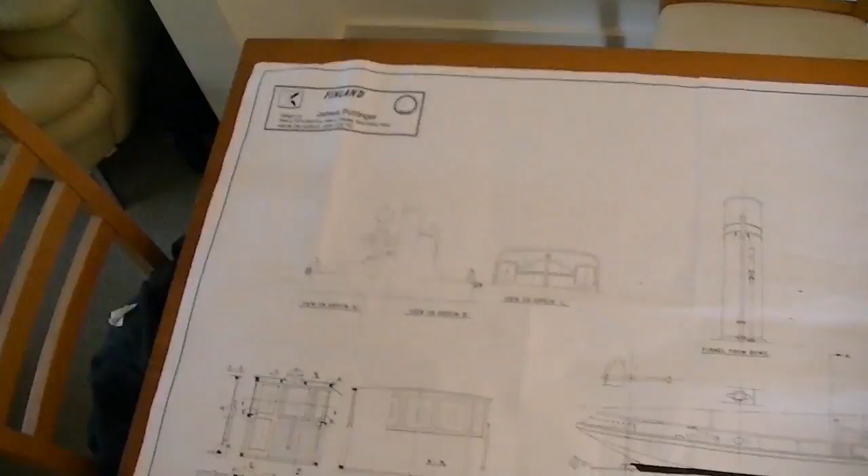They are pretty good, though there are some problems with them that we discuss. There's the scale, we work all that out, work out the cross sections, do a bit of calculation on the whiteboard, then get into making the cross sections, making the keel, putting Humpty together - very exciting - steaming some timber so it will fit on the boat.

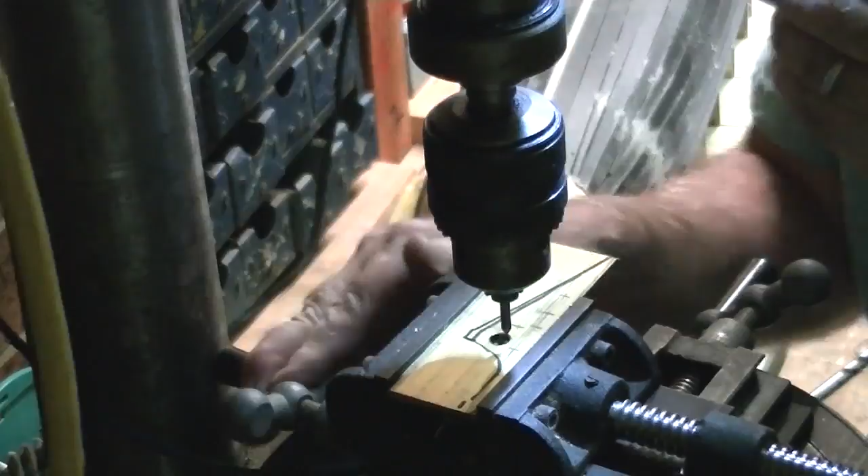Then putting the prop shaft in, and I have my young man help me glue the planks on, which are made, interestingly enough, of cardboard. I put the stern on, the bow on, and then put this frame under the hull that's going to hold the rudder. Then we begin the very first step of fiberglassing and bogging.

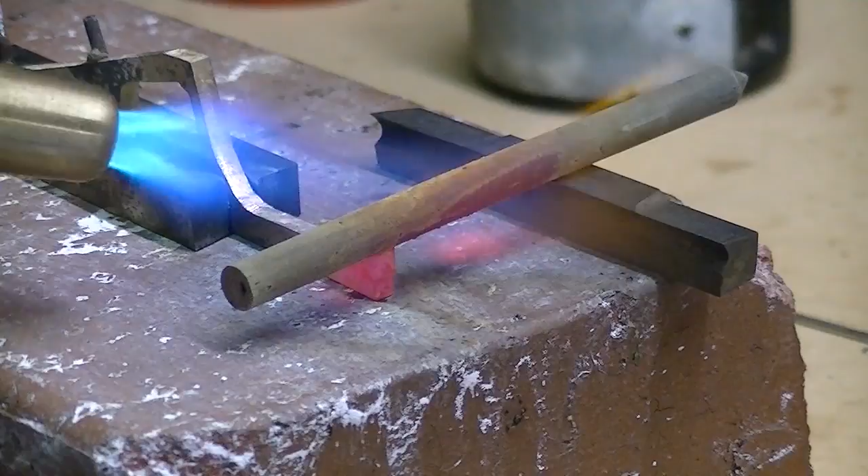I actually trimmed that tree back a bit later on. Finalising this rudder component, broke it out of the mould - gee, all this is so quick. Built a new base for it, and there it is, the new boat.

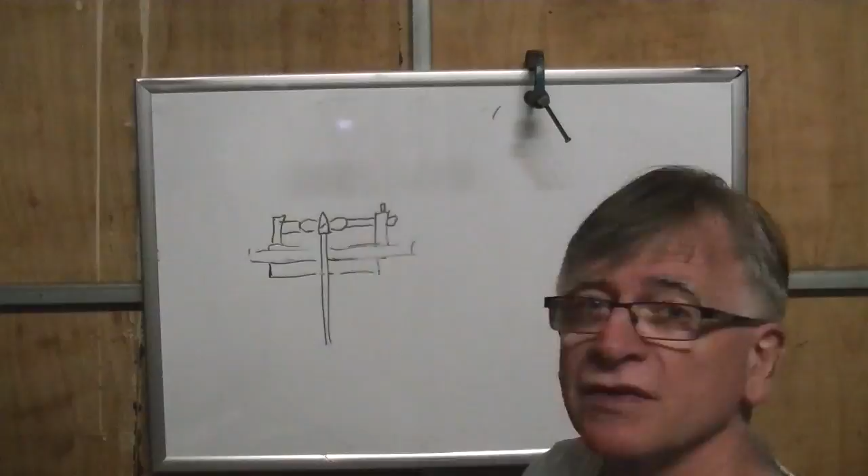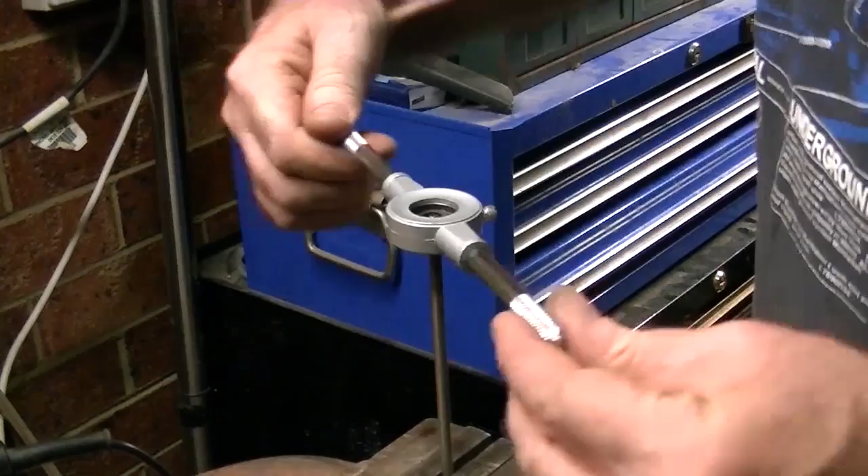We ploughed on then, and I'm very excited about this - we made a propeller, and I take you through this in detail, how to do this. It's really very exciting, including things like putting a die over the shaft, getting this shape on the blade perfect, building a jig - doesn't that look good - and then finally silver soldering it.

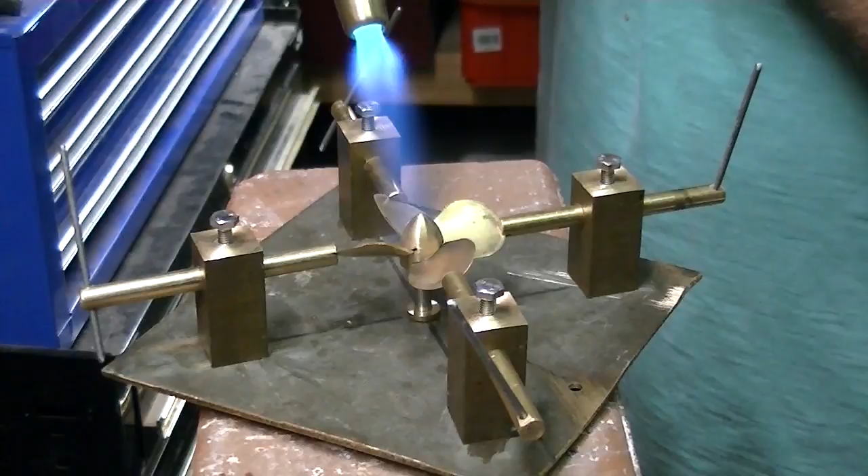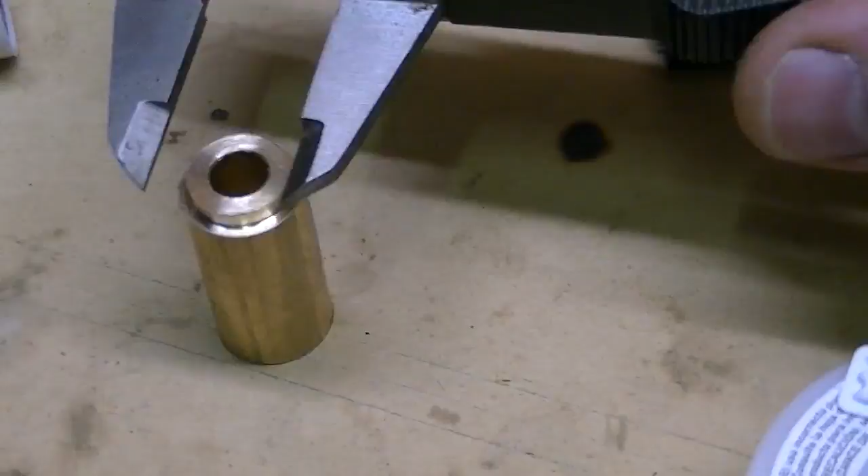Then we have to think about how to connect the motor. We build a construction to hold the motor and put it in, and we're doing all of this now because there's nothing else on the boat and it's easy to get at - things like these hawse pipes, things like the rudder.

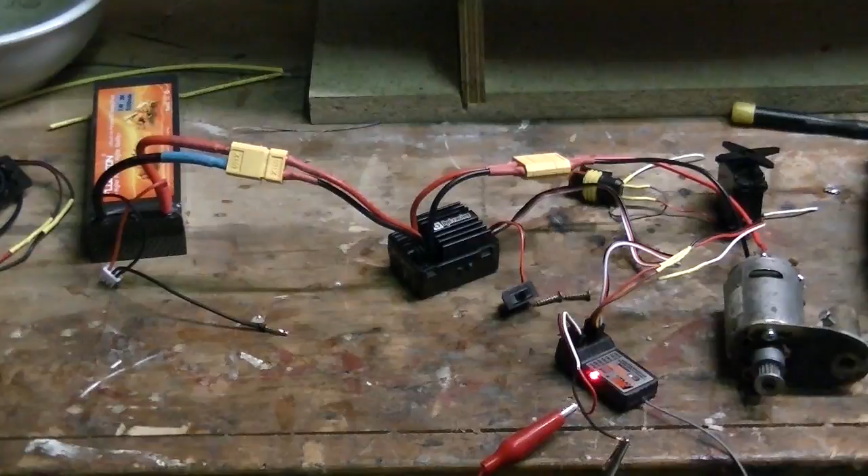Putting in the top frame, putting together some nice lead weights, testing it out for the very first time in the water, and then we get all of the electronic parts and make it work. So we build everything - it's all going to come out again, but now we're going to put the top on, and it's all nicely done in plastic and looks terrific.

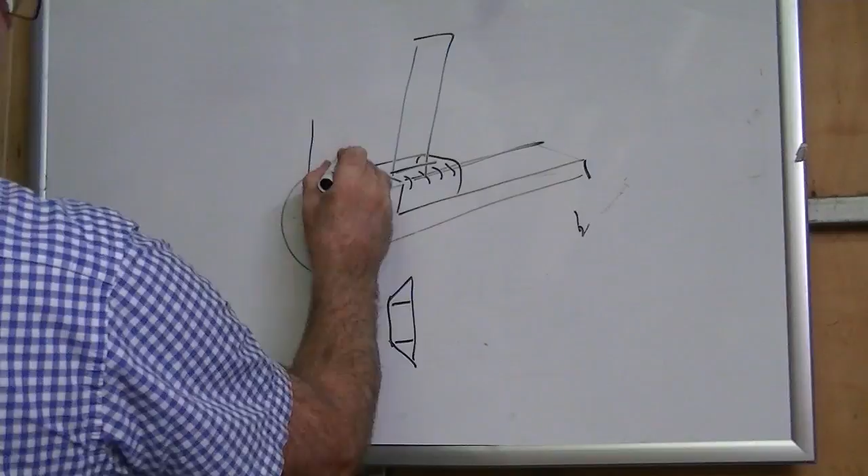We're going to plate it now, so I'm plotting where all the plates go, thinking about the superstructure and how that's going to be built. Stole someone's pen to fix the prop shaft up with, thinking about where the plates are going to go and where they're going to overlap, making the plates, riveting the plates - terrifically effective, as you can see. And doesn't the biro look so good in that position?

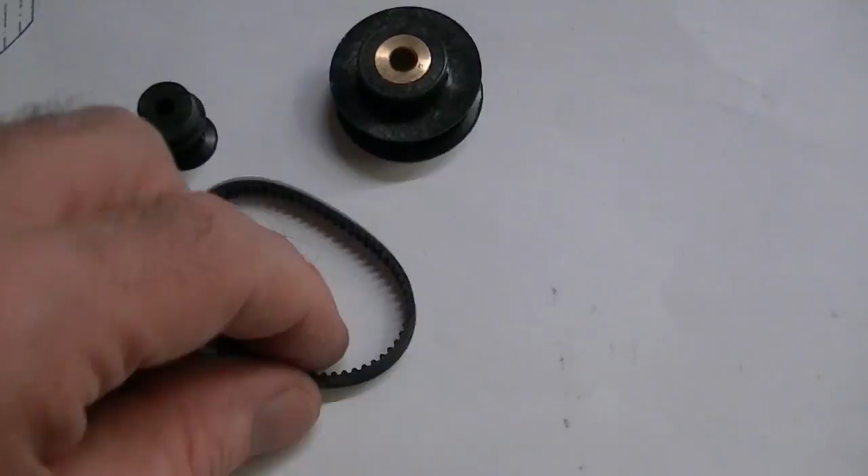Finishing it all off, building the bow, and the boat's now beginning to look just amazing. Superstructure's on its way, reinforcing the bow. Then we have a bit of a retrospective and think about what we've done, what else could have been done, before moving on and putting all the stanchions in with the bulwarks, building the wheelhouse out of plastic, beginning to put some detail in, which is going to look really good.

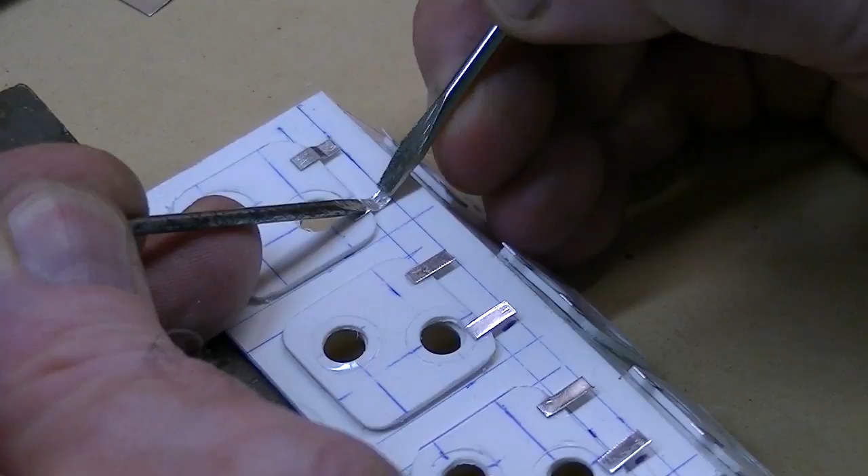I really want to make this wheelhouse fantastic. These are the stabilizers, they've got to be really strong. Now we start doing some of the detail, and a lot of this is extraordinarily fine, but it's not that hard, and gee, it really looks good. Putting the funnel on, making sure the angle is right - all of these things are so important.

Then comes the moment when it all changes and goes grey with etch, and we're preparing now for painting. You can see it's got a waterline, and it's beginning to look like Scuffy. Isn't that fantastic? We put the red on.

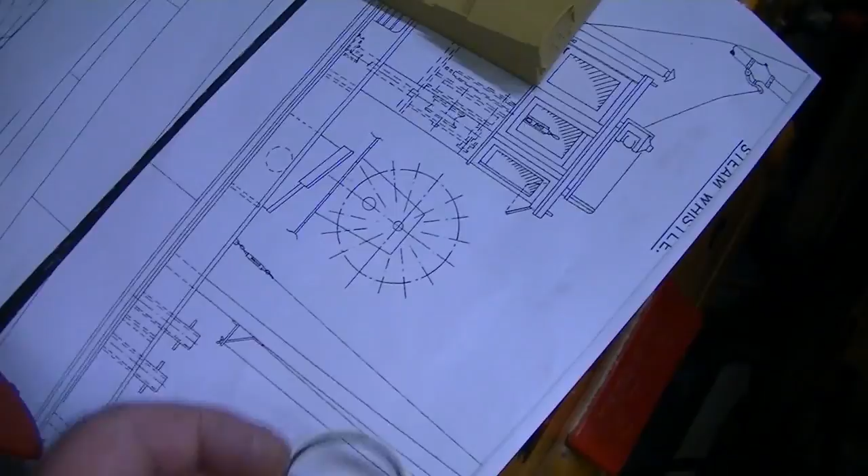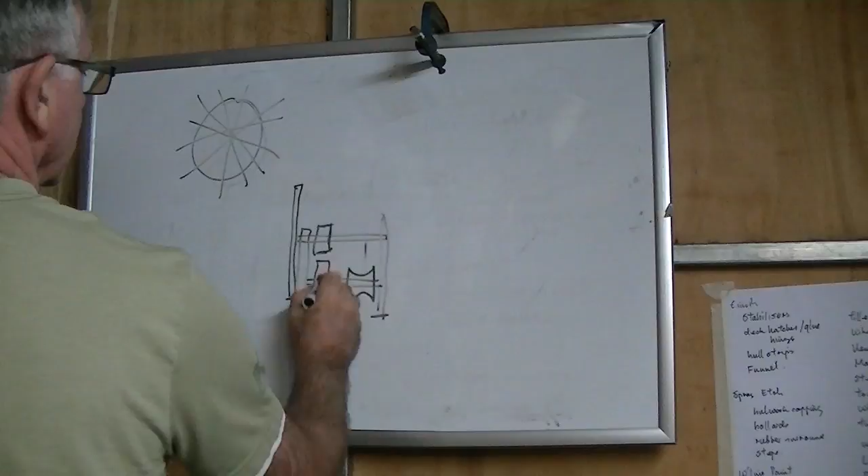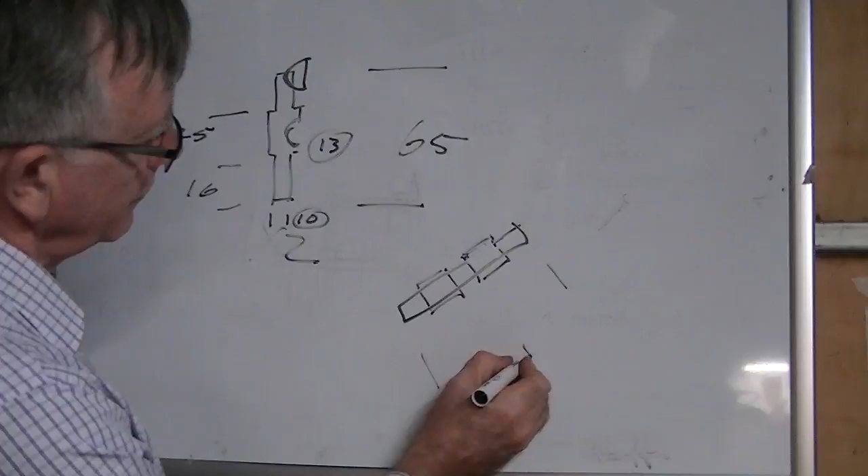You have to do something else at the same time, using the most creatively balanced weights you can imagine to stick things on, making things like the contraption that the wheel turns to push the chain around the deck. It's now got a top, it's got a light, it's got something to stop the light getting out. I'm making the cowls and designing them up, and they look stunning, I've got to tell you.

Fantastic, you couldn't buy them like that. We have to put the chain around the deck that steers the bloody thing. Then it's a chance to have a look at the ballast - how does it look? Does it need any more weight?

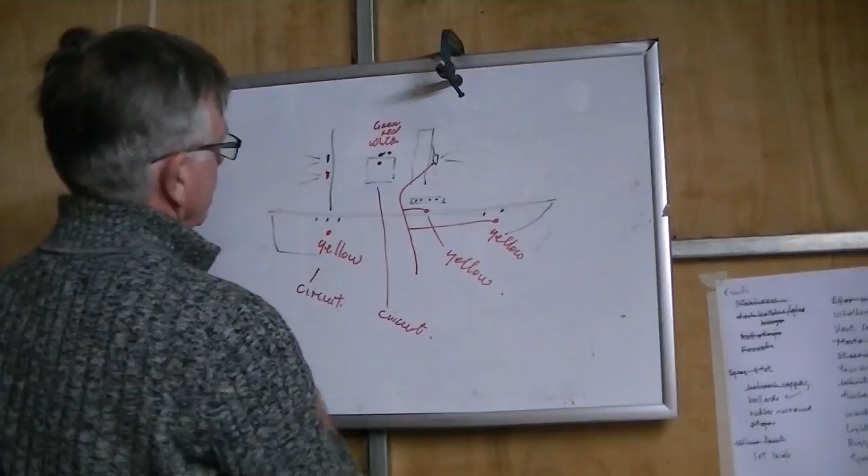Now that is a very, very nice contraption, I have to say - that's the machine that pulls the anchors out. We're looking at lights, where they all go, where the circuits go, fastening everything onto the deck. The lights are working, doing the rigging.